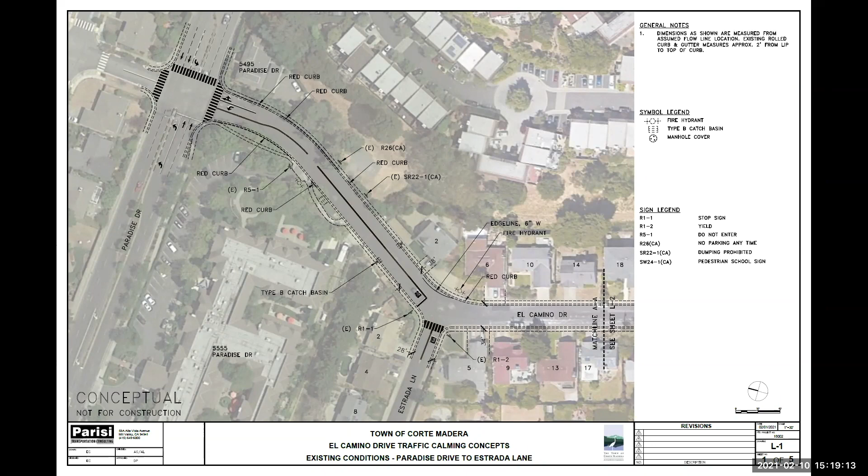But as we know, on a local street, even though that's allowed in California and it's legal, it seems pretty high for some prevailing traffic, particularly those that really exceed it. Our goal on traffic calming programs is often to reduce the number of outliers, those folks really going 30, 40 miles an hour down the street, but also get other drivers to behave better, bring speeds down, and have drivers recognize there are cyclists, pedestrians, people crossing the street, and folks living along the street.

How we usually start our work is by doing an inventory of existing conditions. The first two sheets I'm going to show you have a lot of codes in here, and all those are what kind of details are on the street for striping and for signs and things like that.

We know that El Camino from Paradise up to Estrada has a center line on it, and some red curb areas. But to the south, along El Camino, there is no center line. The street itself is about 34 feet wide, a straightaway used to get up the hill and to and from some other homes. Coming around the curve by the preschool, there's a center line and some curb that's been painted, then an all-way stop sign at Granada.

Going back to this three-legged intersection of El Camino and Estrada, it's a little awkward having these three legs at these angles, with one being stop sign controlled, one approach having a yield sign and marking, and the other having no controls at all. It's very unique and throws some people for a loop, or others don't feel they need to stop completely at the stop sign, and people go through the curve at a pretty good pace. There's also no crosswalk across El Camino there, and we've heard for years during walk audits for Safe Routes to School that there's a desire to provide a marked crossing in an area such as that.

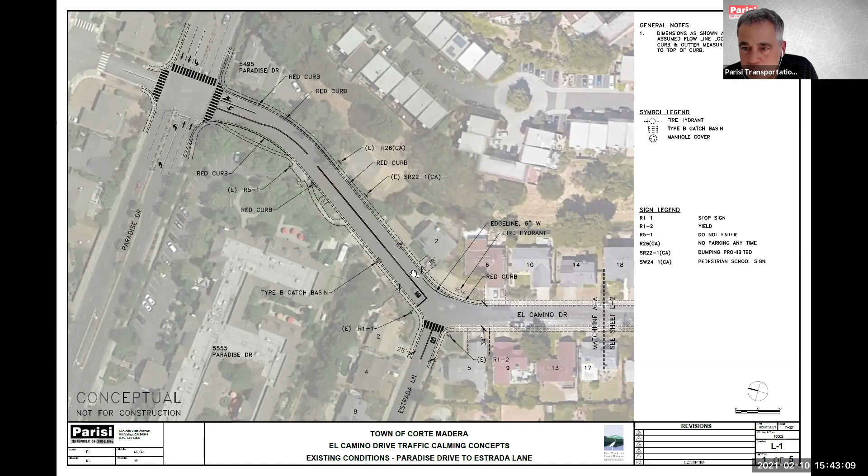Yes, so I can tell you it's 38 feet. This part of El Camino is a little wider—it's 38 feet. Then up here is 34. So this crosswalk would be about 38 minus 12, or about 26 feet long. This would be 26 feet and this would be 38 feet.

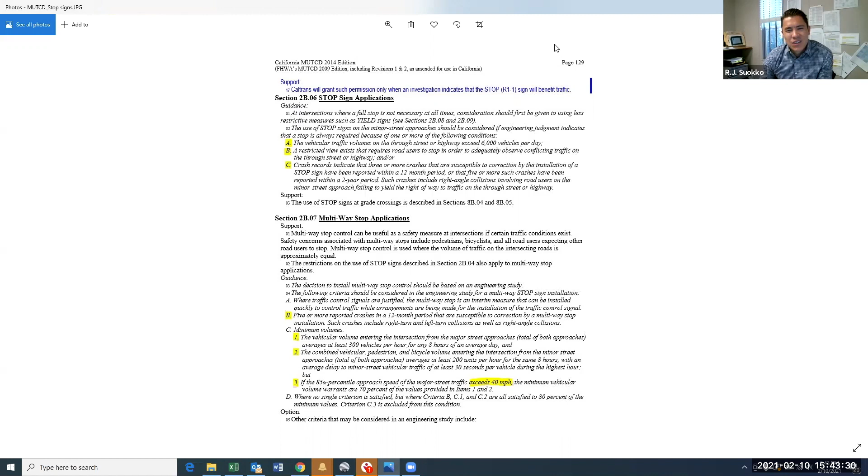Sorry, I think I stole your screen. So the current was what, David? 38. Okay, and then we're reducing it by 12, correct? Correct. This would reduce it by about 12 feet.

RJ, if we know that a three-way stop sign is off the table, do you mind flashing up the code? We can, if folks are still interested, look at that, because I think it would be really helpful if we talked about the two options that have been proposed rather than what we know we can't do or won't do.

I was hoping to spend a little bit on this just because it's a counterintuitive concept. I'd rather see us implement something that's standard, and then if we see things behaviorally that are concerning, we can make the warrants for a stop sign later. So that would be my phased approach.

It really talks about several factors. Just on the single stop sign application, it's asking for 6,000 vehicles a day. Here we have about 700 or 800 vehicles a day. A view exists that requires road users to stop in order to adequately observe conflicting traffic. 3 or more crashes within a 12-month period. And then moving down to the multi-way stop, 5 or more reported crashes in a 12-month period.

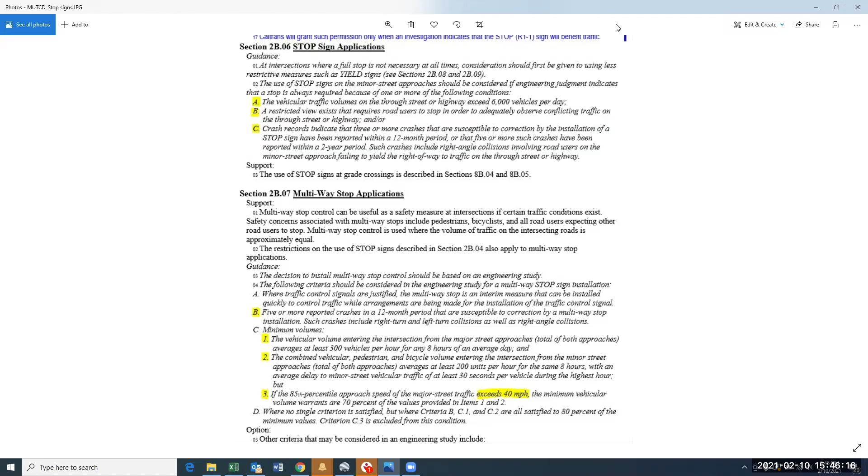I have a question about something different, probably more for you David. I wasn't involved back in October and didn't participate in the last meeting, but have you all considered speed bumps on this street?

RJ, I'm going to turn back to you because I think the town has a policy in that regard.

So speed bumps obviously do tend to cause people to slow. They also have several negative effects that people don't necessarily recognize at the beginning, like making a lot of noise for property owners right there. Sometimes the neighborhood says yes, I'd like them, but just not in front of my house - then whoever gets that bump hears it loud every night as they try to sleep. We also really don't have a precedent for them in town.

I don't think they're the best solution. I like what David's come up with - these traffic calming measures are much better. Also, if we were to consider speed humps, going off of other agency policies in Marin, they usually only consider them when the 85th percentile speed is above 30 miles an hour, and we're not checking that box. You can actually go over most speed humps comfortably at 25 miles an hour, so they're really designed for reducing speeds higher than that.

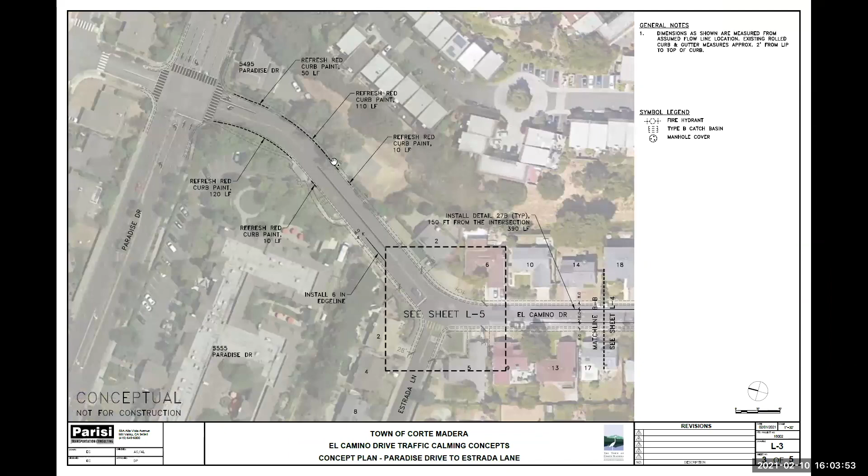Can you fix that lady's sidewalk while you're at it? What's that? I said, can you fix that lady's sidewalk while you're at it? She's got the worst sidewalk in front of her house ever. We will look at some of that stuff as part of the project, so send me the address. No, that's a good idea, we can look down there.

About the bulb out - you know what I want to do. I came to this meeting thinking option A was more beneficial, just like you did, and then listening to folks and understanding the idea about staggering, I don't know if I have a preference right now. What I'd like to do is look at what each of these options would look like with the crosswalk flip-flopped, and then based on your input, see what else we could do to maximize the traffic calming effect through the intersection. There may be some mixing and matching of things we may want to try.

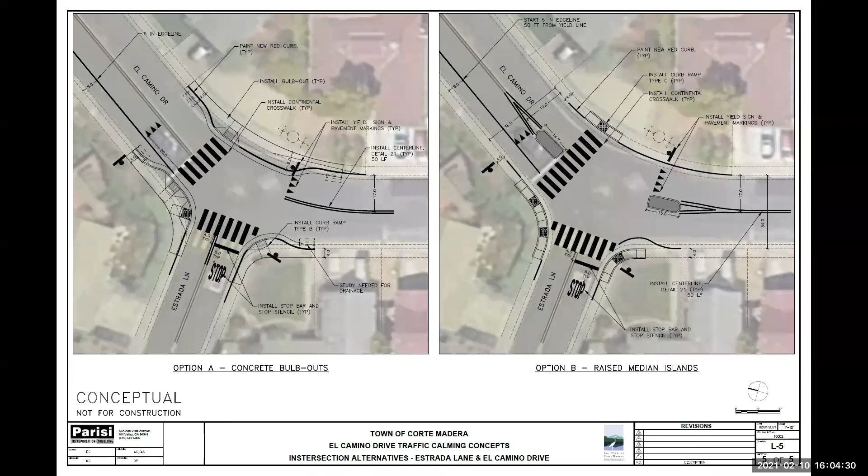If you move that crosswalk, does it change the positioning of those bulb outs? That's what I'd want to see. Yeah, a little bit. If you look at this bulb out, we can have two directional ramps, which is the preferred design nowadays. There's a driveway right here to this house, so it may be more challenging to get two different directional curb ramps in - we may have to have one curb ramp at 45 degrees that we share. I'm not sure, we'll have to look at it. Is it the end of the world? No, but it's not a preferable design.

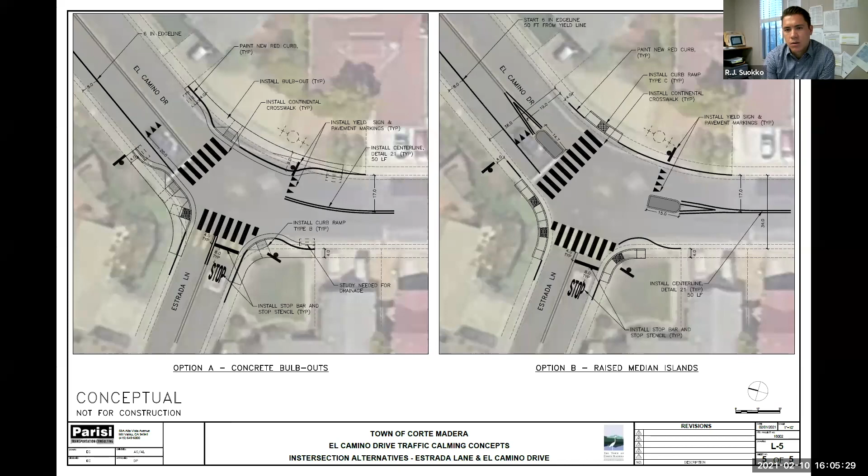What I'm hearing, RJ, is some really good input about moving the crosswalk, seeing if we can mix and match some of the components a little bit, particularly to reduce speed on El Camino through the intersection. I wanted to hear in particular from folks that live on El Camino. We can consider - hopefully I'm on the same page on what you mean by the chicane - I'm thinking like a raised barrier that would take the place of a parking stall, for instance, in a couple strategic locations. We can look at that if those who live on that street are open to losing a few parking spots.

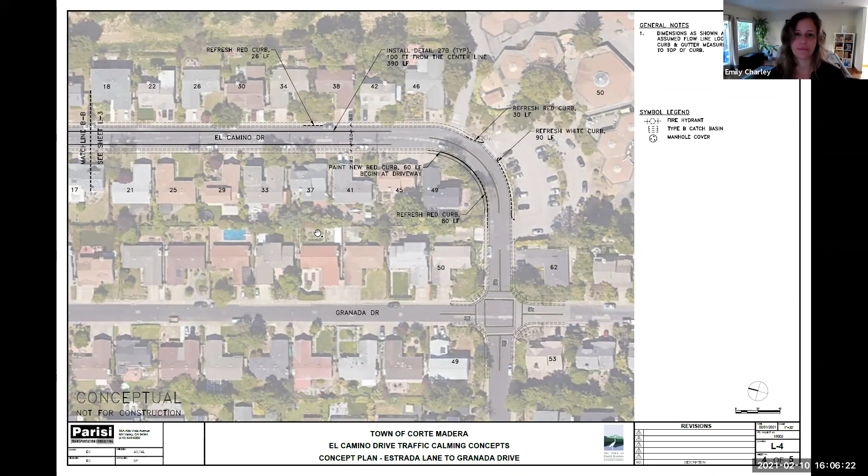Yeah, I'm all for that. Yep, and we don't have enough parking as it is - I mean, I have a book club. Well, someday we'll meet again, but people have to park at the school a lot of times, just because by the time everybody gets their cars in the evening, there's no parking spaces left if you have a guest. Yeah, and if you have nine guests, that's nine cars - it's just ridiculous, so I personally would not want to lose any parking on El Camino. Yeah, but I'm so happy to have my house - that's also ridiculous. Yeah, I mean, we're lucky we have a school, so sending your guests there when you have nine of them rather than parking them in your neighbor's yard is considerate, in my opinion.

I'm hearing a split decision, so at least for a sneak peek, we'll look at that. Where you can see an example of that would be on Bolinas Avenue, off of Sir Francis Drake - it separates Ross and San Anselmo.

There's a roadway that we did traffic calming on. We put 3 of those islands in the middle of the street, kind of pasted them down. They do remove parking near them, and they do create that meandering effect.

So David, I was almost thinking to avoid - let's say you have the edge lines, but no cars parked, some people ignore the edge line and just go faster, using the full paved section. I was thinking of more of a raised something in that parking stall as opposed to the center. Would that be pretty cool if you could do that? You know, you could do a couple retrofits on either side and even throw landscaping in there if the neighbors would take care of it.

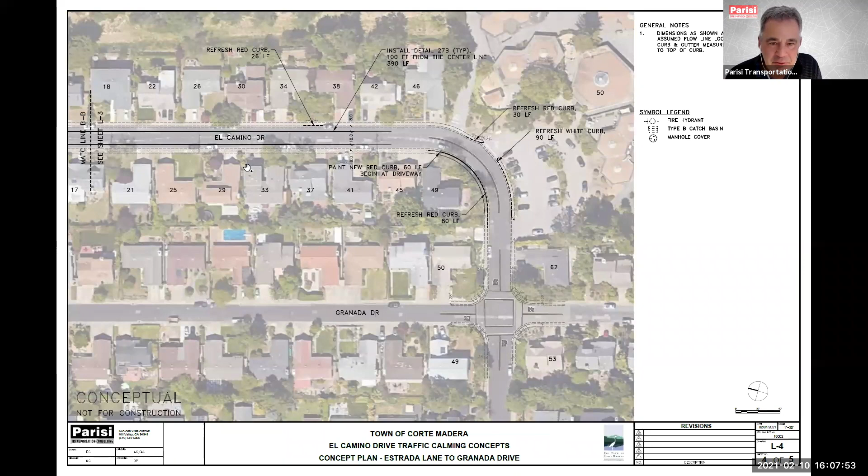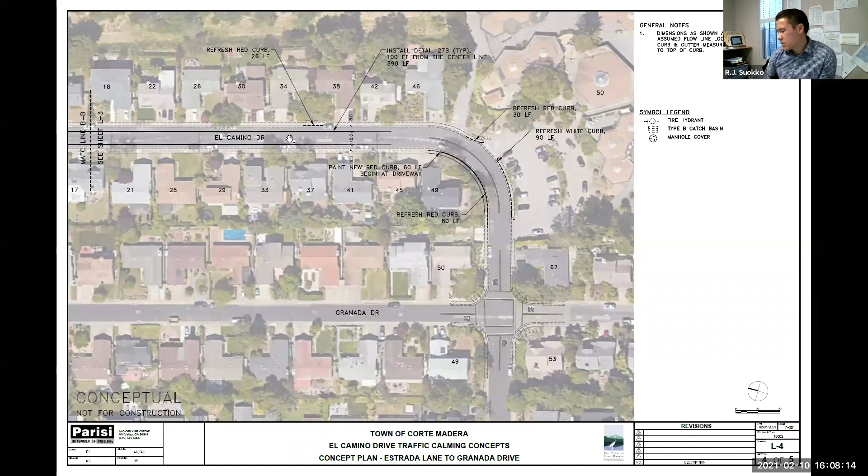It would be that - it would be not in the drainage canal though, right? Yeah, we would keep it free flowing, 2 feet away. Okay, yeah. But you kind of get rid of the cheaters, so to speak, that are flowing over the line. They're not supposed to be going over. Well, that only potentially touches a couple of spots too. Yeah, we could look at that.

Hey, I gotta bow out, but last comment - I do live on El Camino. I am the guy with the drainage problem.

It sounded like the savings of 2 to 3 miles an hour is really focused on the high speeders, bringing that average down. And I was just throwing out the idea that it'd be nice to tag some of those high speeders - a lot of times I see it's like a kid zooming up the hill. You don't necessarily want to open yourself up to any kind of retaliation - I've lost a couple of mirrors and taillights already. So I know they have cameras that can take a picture if somebody's excessively speeding, say over 35 or 40 or whatever the answer is, so you can get those really egregious folks that fly up and down the street.

Yeah, so PD was out there in October doing a lot of enforcement and did pull over a handful of people, including one that you may be familiar with that was at the time driving a black or gray Tesla that was a repeat offender. So they did have that conversation. The PD officer did say that they have difficulties enforcing tickets - I think it was below like close to 35 miles an hour. So there's a challenge there, but nonetheless, they were pulled over and given a stern talking to.